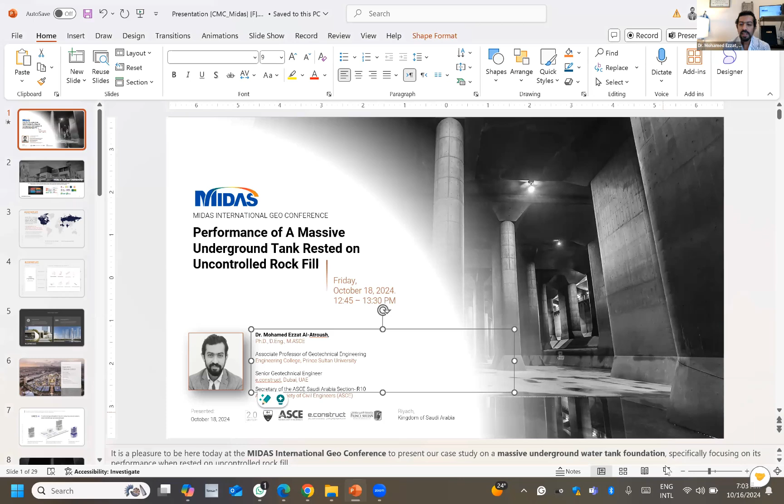The topic I will discuss today is mainly the performance of a massive underground tank rested on uncontrolled rockfill. It's a unique problematic soil. I will explain in the coming few minutes our effort in mitigating or controlling the settlement of this massive underground tank rested on such challenging soil.

First, let me give you just an introduction and a brief about Prince Sultan University. We are a private university located in Riyadh in the northern part. Prince Sultan University has six colleges, including the College of Engineering, which I'm honored to work at, besides the Business College, Architecture and Design College, Humanities, Computer Science and the Faculty of Law.

Prince Sultan University has several remarkable achievements and is ranked in different prestigious ranking systems, besides obtaining several international and national accreditations for our programs. Our campus has around 7,000 students, and for the engineering college, we have several engineering programs, including the one I'm teaching at, which is the civil and environmental engineering program.

Besides this, I will be very happy to introduce Econstruct to you, which is a firm with the headquarters mainly in Dubai in UAE, and our team is more than 200 employees located in several branches in different countries: UAE, Kuwait, Egypt in Cairo and Alexandria, Oman, the US and several other locations.

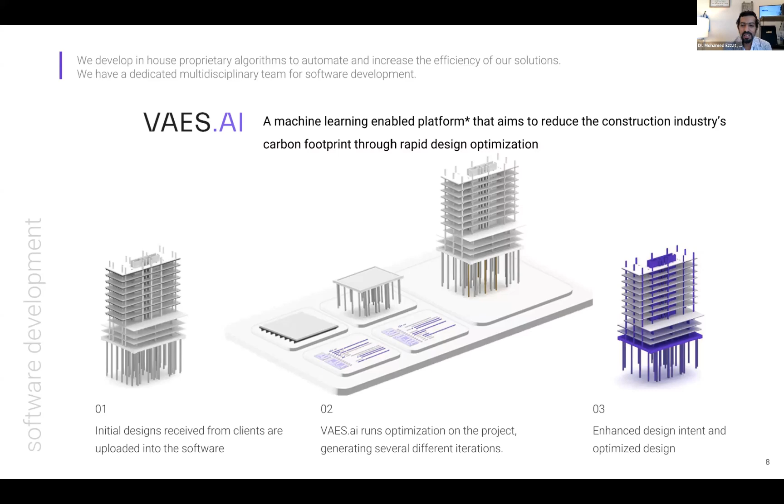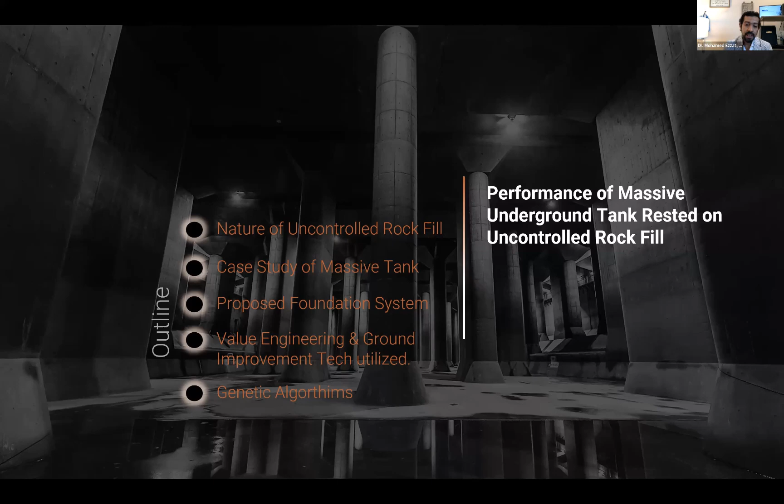Okay, first, let me give you an introduction or just a definition about the uncontrolled rockfill. What is the nature of uncontrolled rockfill? Uncontrolled rockfill refers to the placement of rock material without following strict engineering guidelines, such as proper compaction or grading and quality control measures. For sure, this type of fill often contains large voids and may vary significantly in size and composition, which for sure will affect the stability of such rock. As you can see in this picture, there is a large diversity in the sizes of the particles.

Uncontrolled rockfill has a high potential for long-term creep deformation because of the restructuring under the different wet-shrink cycles or even under the traditional loading. Uncontrolled fill can pose a challenge for construction projects, leading to differential settlement, increased permeability, and reduced structural integrity over time. And careful attention shall be paid if the rockfill structure includes honeycomb-like zones, like you can see here in this picture, that are very loose and may experience local collapse.

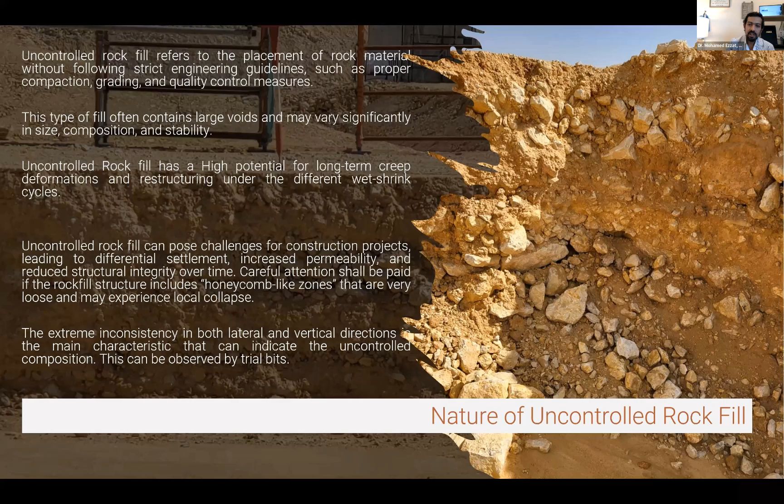The extreme inconsistency in lateral and vertical direction is the main characteristic that can indicate the uncontrolled composition, and this can be observed through trial pits. So, like the excavation you can see here, many voids can be observed, large diversity in the particle size. So if we are planning to construct a massive underground tank above such a soil, this could be a challenging one. And here I have to clarify this point because this could benefit many geotechnical engineers.

If you conduct an SPT test, for example, on such a soil, you may find relatively high values. In addition, if you conduct, for example, a plate loading test, the engineer could obtain very high results. However, unfortunately, some engineers may incorrectly classify this soil as a dense or very dense soil, which could be misleading. Because the high SPT is primarily influenced by the presence of large and irregular rock particles, as you saw in the previous slide, rather than uniform soil behavior. Such misinterpretation may lead to inaccurate assessment of the material settlement potential and of the stability of the foundation system.

If you conduct sieve analysis for such soils, the very large particles like the one shown in the previous photo will be excluded. As you know, most of the standards recommend that particles with size higher than 63 millimeter could be excluded from the sample. So you may not experience such large boulders within the sieve analysis test, and accordingly, the classification of this soil could lead to a misleading representation. So, in such cases, alternative methods could be utilized, like trial pits and open cut excavation, to realize the actual sizes of the boulders and cobbles that may exist within such soil.

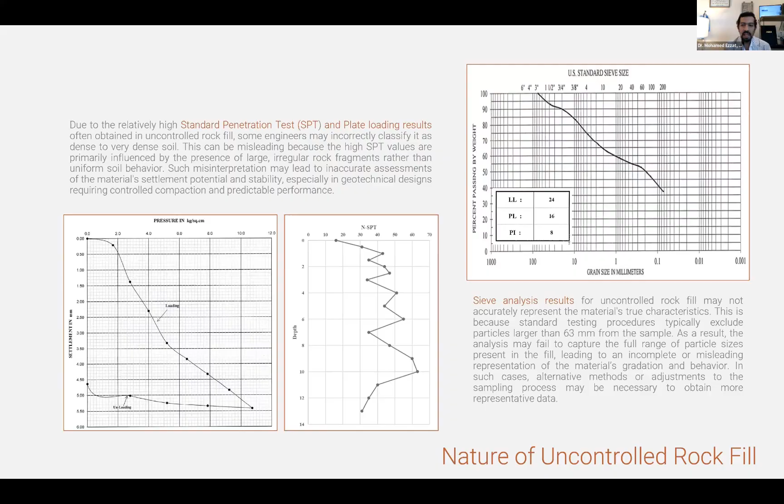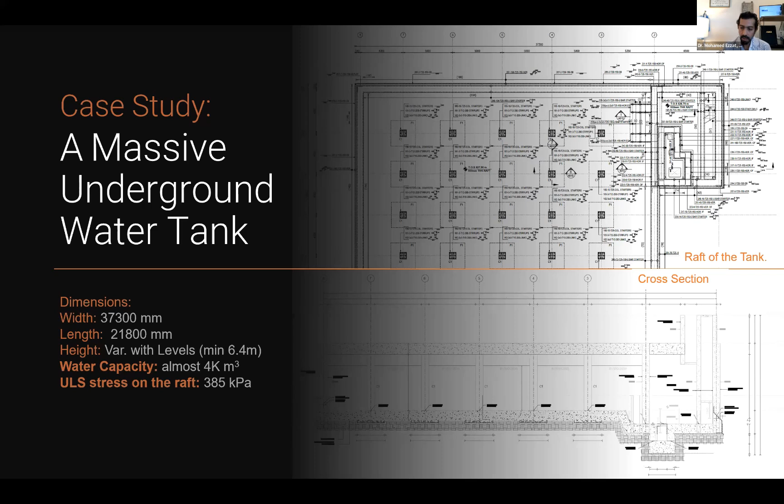The tank we were planning to construct above such uncontrolled rockfill is a massive tank. Its width was around 37 meters, and the length was around 21 meters, with height varying with the level, but on average it was around 6.4 meters. The water capacity of this tank was around 4,000 cubic meters of water. The expected ultimate stress was around 385 kPa, which is for sure a heavy and massive tank. This summarized cross section explains the condition. We have the massive water tank, and 8 meters of planting soil will be filled above this tank, and this tank is rested on the uncontrolled rockfill with thickness of 13.5 meters, and under this uncontrolled rockfill there was a limestone layer.

Like any foundation system we are designing on a daily basis, the foundation design must prevent failure by maintaining a sufficient factor of safety. Additionally, we have to ensure that both total and differential settlement are within the accepted range. The design requirement for this massive water tank was following the country standard. So, according to the Saudi Building Code, the allowable settlement of any foundation raft should not exceed 60 millimeter. However, the structural design of the tank limits this settlement to only 30 millimeter to maintain the structural integrity of the tank.

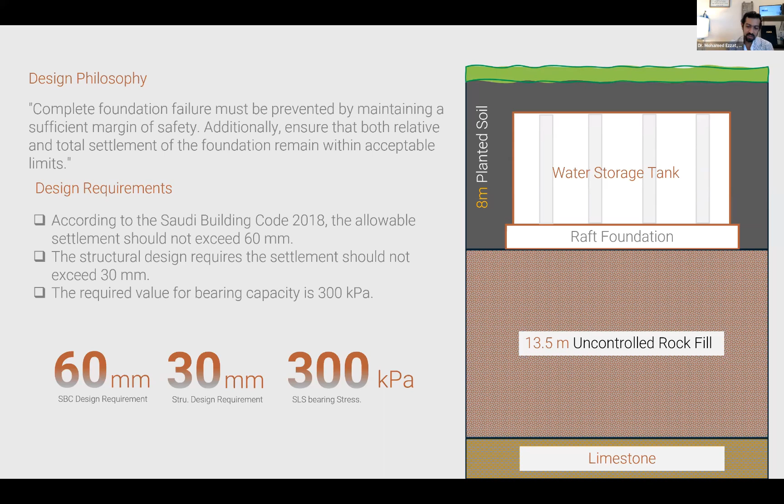So we have a strict requirement, which is the total settlement should not exceed 30 millimeter. Also, the working bearing pressure should not exceed 300 kPa. So we have this 30 millimeter settlement, and we have this massive water tank rested on uncontrolled soil. So this is the challenge we are discussing today. In traditional practice, first we start to simulate the actual situation. What if we place this tank on this uncontrolled rockfill with the engineering properties we obtained through different field and lab tests?

And when we started to simulate this in a 3D model using MIDAS GTS NX, the settlement we found was 76 millimeter, which is more than double the design requirement. As I mentioned, the design requirement for this case was only 30 millimeter.

So the traditional raft foundation may not be a suitable solution for such a massive tank. The analysis conducted for this assessment was traditional stress analysis using a full 3D model, as you can see here in this image.

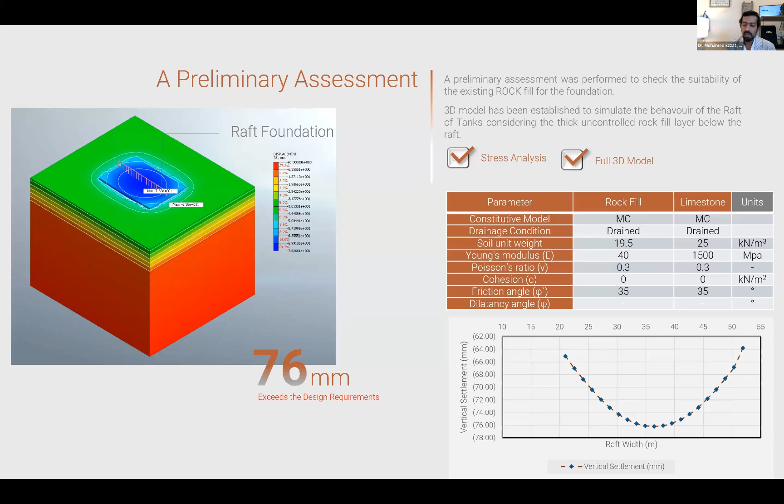And after this, we started to take the second traditional step, which is: what if we replace some of the uncontrolled rock fill with engineering fill with very good properties, with high modulus of elasticity and high friction angle? So we tried to replace the first meter, then the second meter below the raft, and the third meter and fourth meter. So we extended our trial to replace 4 meters below the raft.

What we experienced through stress analysis and the 3D model: the settlement reduced to 61 millimeter after replacing 1 meter below the raft, then reduced again to 52 millimeter when we replaced 2 meters below the raft. And finally, when we replaced 4 meters below the raft, the settlement was 50 millimeter.

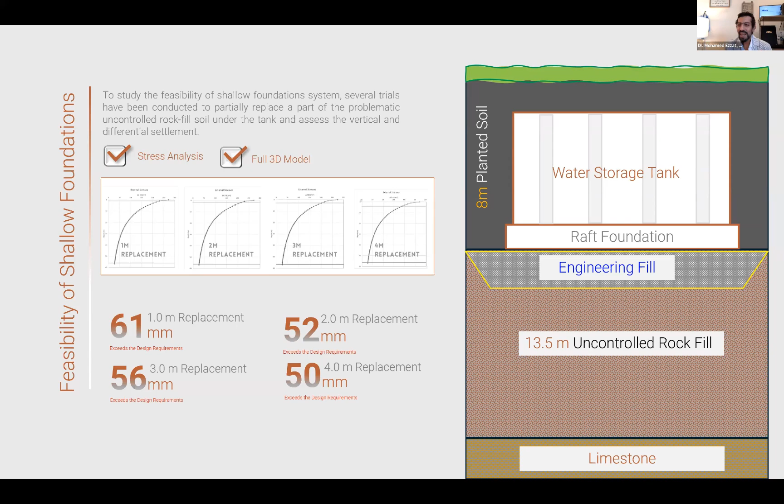For sure, this gave us an indication that the shallow foundation will not be feasible in this case, because this is a very large settlement compared to the design requirement. As I mentioned, and I remind you many times, our target was 30 millimeter only.

So we started to think about the deep foundation, and at one location on the same site there was a bi-directional loading test conducted for one of the piles. So we started to study the result of this loading test before taking the decision of deep foundation.

As all of us know, the deep foundation solution is very expensive, and this was not only one tank, it's many tanks distributed across the project. So taking this decision would be a very costly decision. Besides, we also had to study whether this deep foundation or pile system would be feasible if it was implemented within this uncontrolled rock fill.

So the pile load test I will show in the coming slide was for a pile with diameter 800 millimeter and length 15 meter. It was a floating pile completely embedded in the rock fill layer. So this is a floating pile implemented completely in the rock fill layer. Also, it was erected inside the pile diagram.

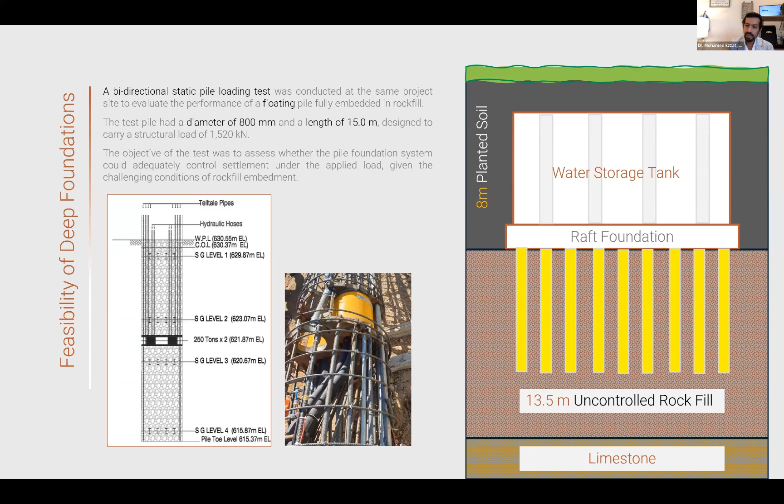This is a traditional setup of the bidirectional static pile loading test: the upper part will be loaded and the lower part will be loaded vertically. And for sure, there were strain gauges distributed along the pile to monitor the deformation at several levels. These are the results we obtained.

The pile was loaded with 4,140 kilonewton. It was three times the design load of this pile, and the load transfer and load distribution along the pile was measured. You can see here the unusual behavior of this pile.

As you can see here, when the pile was loaded, the unloading behavior, for example in the lower part, was almost a steady line. It was almost a straight line, which means that no rebound was obtained when the load was removed. So when the load was applied, settlement started to increase, and when the load was relieved, no unloading deformation was obtained, or very, very minor values.

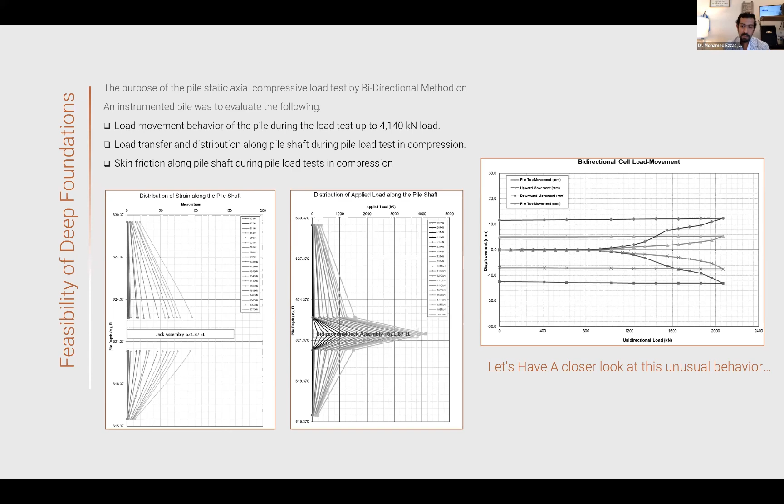So let's dig more and get a closer look at this unusual behavior. I'm not sure if you've experienced something like this before or not. This was our expectation about the behavior of this pile.

As I explained, this uncontrolled rockfill has large particles surrounded by relatively small particles of fine soil. So when we start to apply the vertical load, due to the poor compaction, the soil around the pile may be compacted further under the applied load, which leaves less space for the soil to spring back, meaning the applied load continued the compaction process, which initially was poor. This can happen in soil that initially had voids or was very loosely compacted.

The second expectation was creep behavior. Usually, the slow deformation may not recover immediately when the load is removed. The third expectation was gap formation. As you saw in the image of this uncontrolled rockfill, there is something we call honeycomb-like zones.

Under certain conditions, the loading can cause the pile to move away from the soil, creating a gap between the pile and the soil. When the load is removed, there might not be sufficient lateral pressure to push back on the pile effectively.

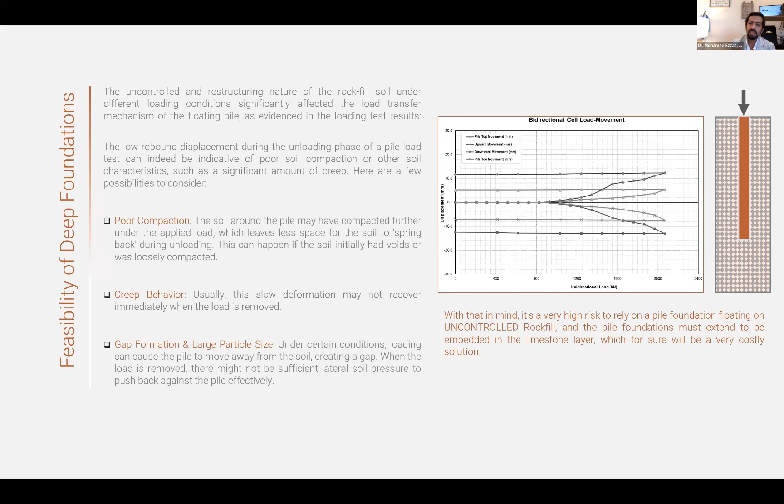That's why the unloading deformation was very minimal in that case. So with that in mind, it could be very, very risky to rely on pile foundation floating on uncontrolled fill. So in that case, we had to extend the pile length to reach the limestone layer, which will increase the cost more and more, which will be a very, very costly solution. So with this, we mainly commented on the feasibility of shallow foundation and deep foundation in such case.

So as I mentioned, our scope is mainly giving a lot of attention and caring a lot about value engineering. So what was the proposed solution for this unique case? We proposed stabilizing this uncontrolled rockfill using controlled modulus columns, which is CMC, or commonly known as rigid inclusion. I guess most of you may be familiar with this system. It's a column installed inside the soil that will be stabilized, and above these columns there will be a load transfer platform (LTP), and the foundation system, like any shallow foundation system, is placed above this load transfer platform.

The main load transfer mechanism of this system is the arching action. When the load is applied above the LTP, the soil between those columns will settle more than the columns or the piles. So this will create arching action within the LTP and start to distribute the transferred load through the LTP on the pile head more than the inside soil. It's commonly used in several applications like roadway embankment, storage tank, parking structure, isolated spread footing, mat foundation and railway embankment. For sure, it's commonly used also with storage tanks like the case we are experiencing today.

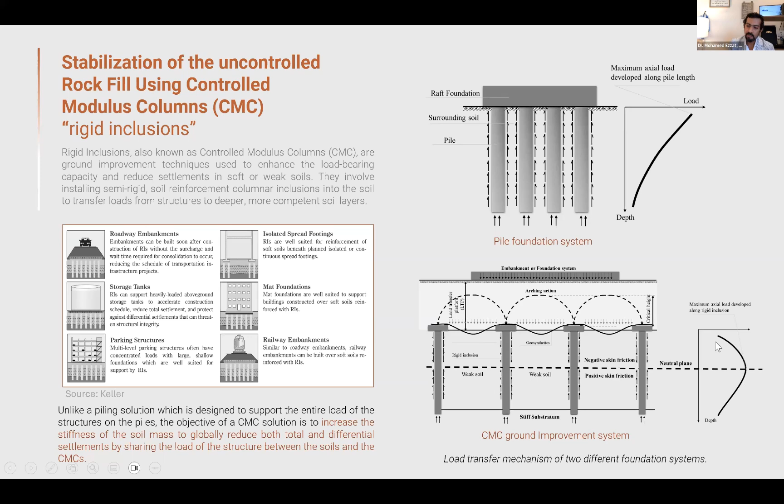In the CMC case, since we are dealing with expectation of high settlement or soft soil, the settlement of this soil could be more than the settlement of the column or the pile. So there is a great expectation for negative skin friction, like you can see here. Then there will be the neutral plane. Then the soil will start to have some kind of positive skin friction again. So the load distribution could take this shape. Okay.

Now let me show what we did to study the behavior of such system with our tank. This is a 3D finite element model we developed using MIDAS GTS-NX, and it was also a stress analysis to control or to study the settlement. And as you can see here, the soil layers, which is uncontrolled rock fill, was simulated, then the limestone layer, and above this layer, there will be the LTP, which is a granular soil with very good properties, with high friction angle value and relatively good modulus of elasticity.

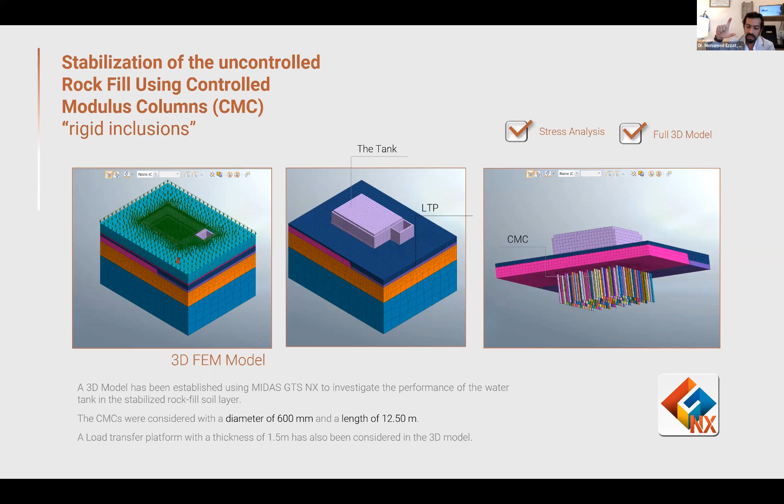And then under this LTP, there will be the columns or the CMC piles, which are distributed in a square pattern. We tried 600 millimeter diameter columns with length 12.5 meters to be rested on the limestone layer. If you remember, the depth of the uncontrolled rock fill layer was 13.5 meters, and if you deduct the LTP thickness, you will have about 12.5 meter length of the columns.

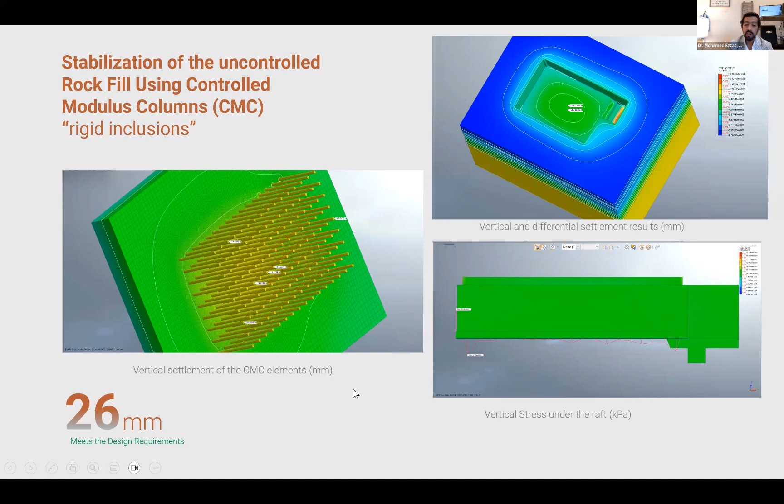So what we found is that CMC with the LTP was able to control the settlement of this raft. So if you can see here, the settlement of the raft has significantly reduced to be 26 millimeters, which is less than the 30 millimeter, our benchmark, our target value based on the design requirement. Also, we checked the settlement of the columns themselves. It was also within the accepted range. The vertical stresses of the raft were also within the range, which may confirm the feasibility of this solution. But we have to dig more to start the designing process of this system.

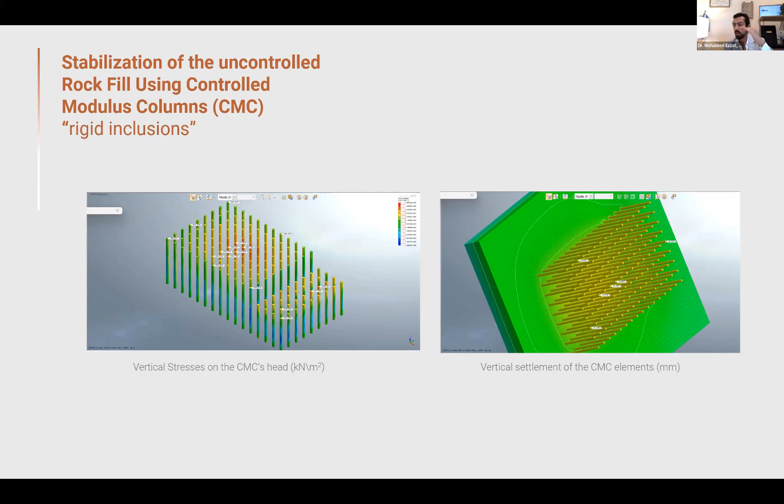So we started to explore the differential settlement between the columns, the corner ones and the central ones, the variation in load transfer to each column. As you know, these CMC columns are plain concrete, so we have to check the structural design of these plain concrete columns and make sure that the applied load that will be transferred from the raft will be less than the structural capacity of such columns. In addition, for sure, we have to control the settlement of these columns to be within the accepted range. To do this, we started to extract the results from the MIDAS GTS model. And here is the pile load distribution or column load distribution. As you can see here, the first part, around 9.5 meters, experienced negative skin friction.

Despite this high friction angle and high plate loading result we obtained from the plate loading test and SPT test for this uncontrolled rock fill, you can experience here negative skin friction. The main reason for this negative skin friction is that the uncontrolled rock fill has settlement more than the pile, which leads to negative skin friction at the upper part of the column. The neutral plane was located at 9.5 meters, and then the skin friction turned to be positive again.

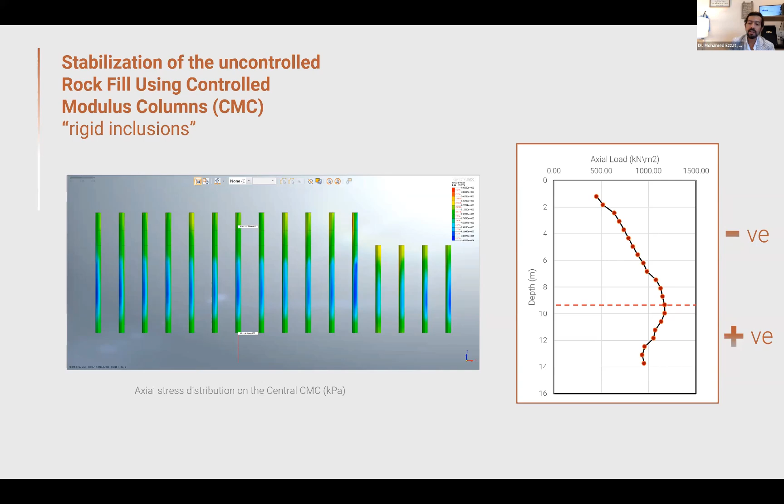We use this load distribution to obtain the geotechnical capacity of these columns. I highly recommend using the Federal Highway standard for calculating the geotechnical capacity and load transfer mechanism of this system. As I explained, the main concept of such a system is arching action. So we had to ensure that the thickness of the LTP utilized in our system will be sufficient to generate the arching action above the column heads. So we checked the critical heights using the Federal Highway Standard and ASIRI recommendation as well.

So the arching action, as I explained, transfers the load from the LTP to the pile head to reduce the load transferred to the in-between soil. As you can see here, MIDAS model was very helpful in ensuring the arching action. The vectors' direction confirms the load transfer direction. The load has arching action, transferring most of the load to the columns. For sure, a portion of this load will be transferred to the soil, which is fine and which leads to the negative skin friction, but we have to check that the soil is able to also resist this load.

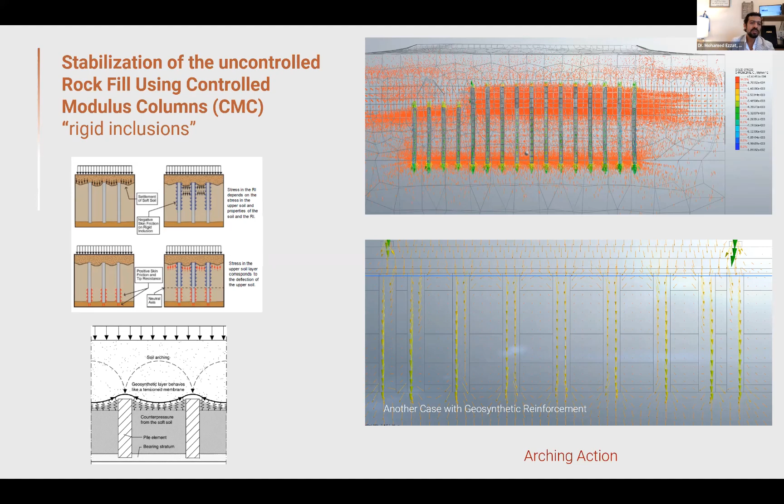So this photo below here is for another case, where we can utilize geosynthetic reinforcement within the LTP, which is also a common practice. It's used if you are experiencing large shear stresses through the LTP. We can also use the geosynthetic to increase the efficiency of load distribution. When the load is applied through the LTP, the geosynthetic will start to bend, generating tension forces, and will contribute to distributing the load among the column heads. This also promotes the arching action, which will enhance the load transfer mechanism. So I guess these photos are very clear for the load transfer mechanism of such a system.

Again, we go back to the value engineering. The first distribution of the columns we proposed had 12.5 meter column length and was distributed in a square pattern. The total number under this tank was around 150 columns. So we started to conduct some parametric analysis to find the most optimum solution for this case. We tried to change the pattern of the CMC distribution under the LTP, and we tried to change the length of the pile.

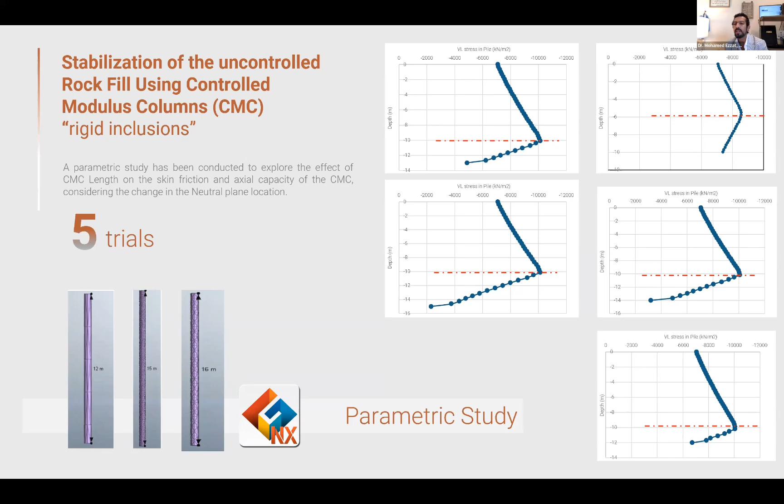As you can see here, this is just a few samples from the trials we conducted. We tried to change the length of the pile with different lengths: 12 meters, 15 meters, 16 meters, and so on. So as you can see here, the neutral plane was changing with the changing of the depths. For sure, this is a function of two main items: the settlement of the pile and the settlement of the soil, and the shear stresses at the interface between the pile and the neighboring soil.

For sure, the common definition of the neutral plane is the point at which the settlement of the soil equals the settlement of the pile, which means after this, the skin friction will start to be in a positive direction. In addition, at this neutral plane, the shear stresses at the interface between the soil and the pile will be zero, which means that the skin friction will start to turn to the positive direction.

So to know the location of this neutral plane, you have to simulate the behavior and establish a numerical model like the one I presented. And to optimize your solution, you have to conduct hundreds of trials to achieve the best pattern of distribution of the piles. You have many options like square pattern, staggered pattern, and triangular pattern. You can change the spacing, and you can change the pile length and diameter.

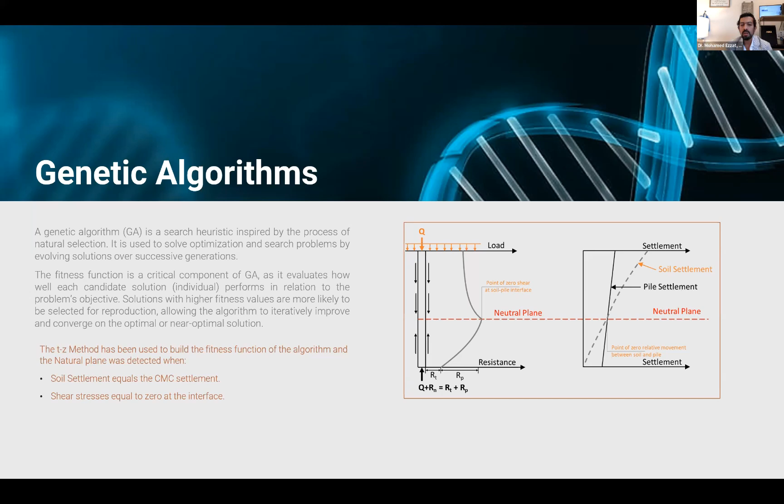So you have to define an equation that describes the location of the neutral plane. In our case, as I explained here, the location of the neutral plane was the location at which the soil and pile settlement will be equal, and the differences of the shear stresses at the interface between the soil and the pile will tend to be zero. This was the criteria we utilized to establish the fitness function of our algorithm. We utilized the T-Z method to calculate the pile and soil settlement and conduct hundreds of trials to know the location of the neutral plane in an accurate manner.

And this is a quick video. You can see here the software we developed, the algorithm I mean. Here we are uploading the Excel files we obtained through MIDAS GTS NX. Then we started the optimization process. As you can see here, a lot of generations are developed, and generation here means trials. It conducts a lot of trials, changing the length of the pile and calculating where the neutral plane will be. For sure, many of these generations could not meet the fitness function we defined, which is, as I explained, the pile and soil settlement shall be equal and shear stresses should be zero at the interface.

So here, as you can see, there is a result of the generations. For each one, the algorithm is calculating the load settlement behavior and the load distribution of the column, the settlement of the pile, and the settlement of the soil, and starts comparing them. It compares the pile settlement and soil settlement and finds where the location of the neutral plane is among the whole generation. As you can see here, this was generation number 10, which meets the criteria. This algorithm conducted 100 generations, which is 100 trials. And the location of the neutral plane obtained was around level 10 meters.

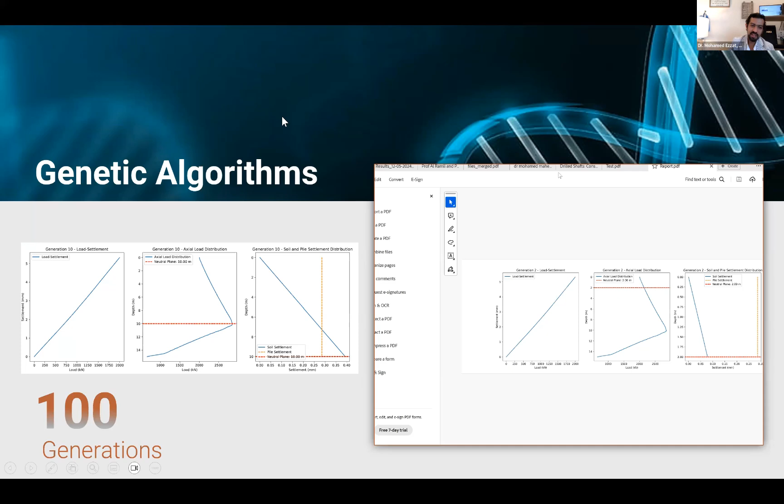And at this line, as you can see here, the skin friction tends to be positive, and above this one it was negative. And at the same location, the settlement of the soil becomes equal to the settlement of the pile, which meets the criteria we explained. So this was the optimum case, which we utilized in our project.